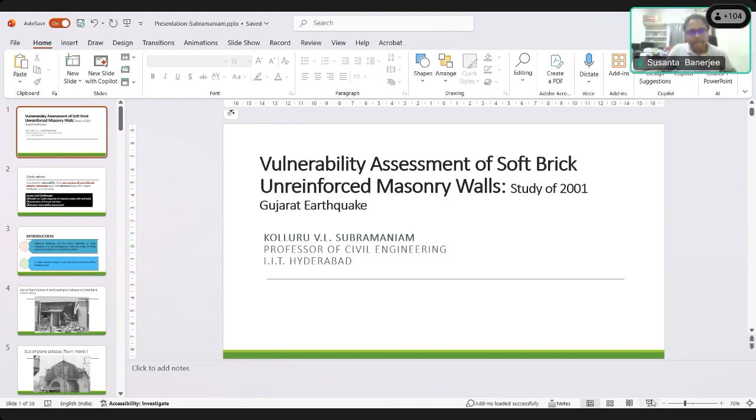So what I would like to present today is about vulnerability assessment of soft brick unreinforced masonry walls, and I'll illustrate this with the 2001 Gujarat earthquake. That's basically a case study that I will be presenting. The whole idea here is to understand what is the vulnerability of this particular form of construction.

Now, why even look at this form of construction? The reason is that if you look at 70% of our construction in India, it is basically what we call unregulated or non-engineered construction. And of that construction, a predominant stock of buildings is basically made up of unreinforced masonry walls.

These are used as load-bearing masonry. Usually what happens is the structure starts off as a non-engineered structure. People build with experience—they stack up some masonry walls, put a concrete slab on top, and that becomes a temporary abode for some people. Initially they start residing there, then they start expanding by building floors above it.

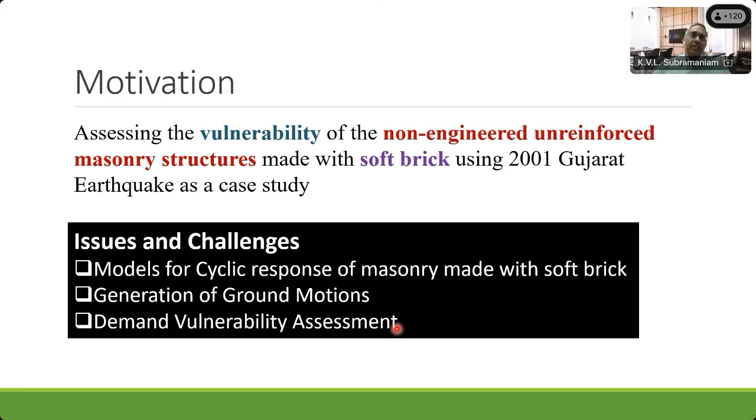Coming to the introduction, masonry buildings are the oldest buildings, and have been used for a long time. Masonry is a non-homogeneous material because it's basically made up of two materials, brick and mortar, placed in a repetitive pattern. So what you get is a composite material, not a homogeneous one, where thankfully we have a repetitive pattern of joints that form between the bricks.

Now, in India, as I mentioned, more and more we are seeing masonry made with soft clay brick, and we are finding that a lot of our construction, almost 60% of the building stock, is made up with this soft clay brick.

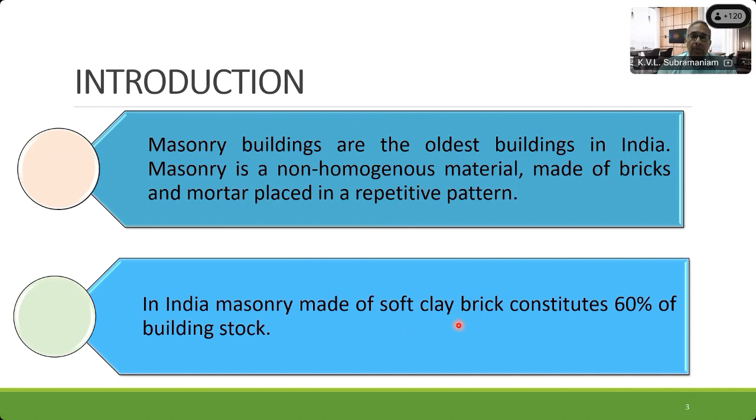Let me start by showing you the nature of the problem we have. This is the outcome of what happened after the Bhuj earthquake. You see a lot of unreinforced masonry, a lot of it load bearing. In this case, this is a particular case of out-of-plane failure of masonry.

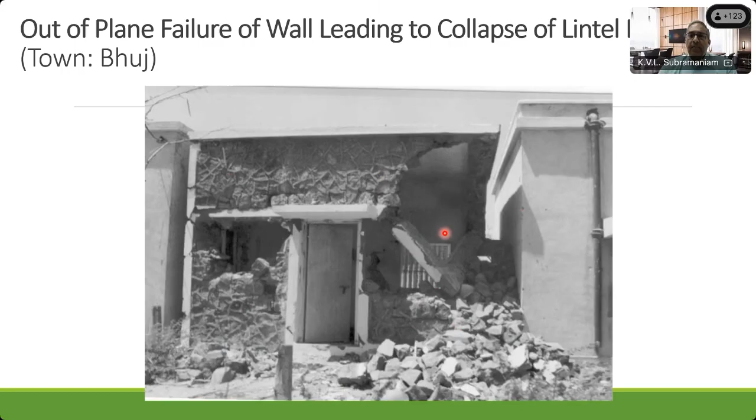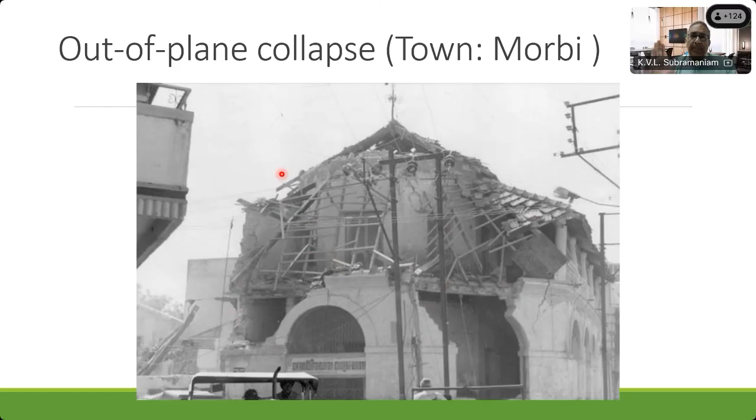But there were also a lot of out-of-plane failures of masonry structures, and this is exactly what I was talking about. You see the masonry here, load-bearing masonry with a concrete slab, and this stands no chance against an earthquake. This is again an out-of-plane failure where the wall collapsed in a direction out of plane of the wall itself, but there were also a lot of in-plane failures. You see this particular house here, again masonry construction, with diagonal cracking and extensive damage in all these load-bearing masonry structures.

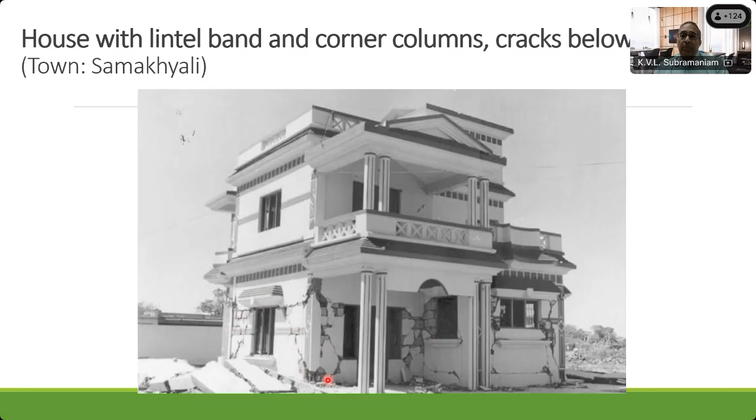More cracking that you see here. This, of course, is a case of an infill where you have a reinforced concrete column where masonry is used as an infill, and even there you saw extensive cracking in the masonry unit.

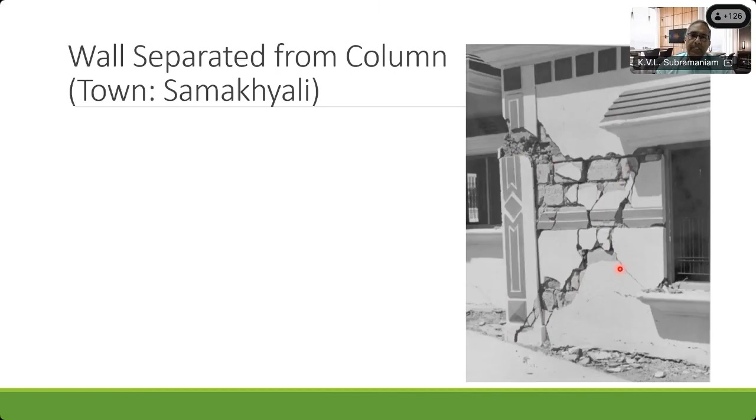So coming to the first part, it was basically trying to understand the behavior of masonry. What do we know about predicting the response of masonry, particularly under lateral loads?

Typically, when we look at a masonry unit like what you have here, it's an assembly of bricks which are put together, and they're separated by these mortar joints. The horizontal joint is called the bed joint, the vertical joints are called the head joint. So the bed and head joints are formed. We have a repetitive pattern of bricks held together by this mortar, and the mortar is basically the glue that holds together these bricks.

Now, it's a composite material because it's made up of more than one material. You have brick and mortar, and therefore, if you want to really predict the response of masonry, what becomes important is the relative stiffness of these two materials. The stiffness of the brick and the stiffness of the mortar play a very important role in determining the load response of the masonry.

Now, most of the studies in the literature come from stiff brick masonry. So what do we call stiff brick masonry? It's where the brick unit, which could be hard fired clay or stone, is extremely stiff. If it's made of stone, you know it's a very stiff material, and you have a cement mortar or lime mortar that holds the stones together.

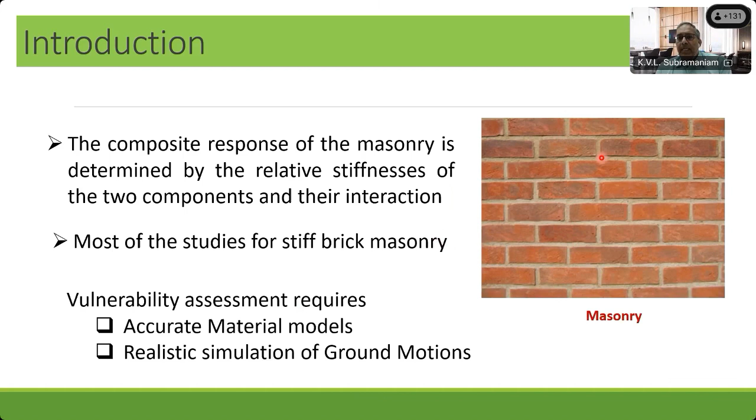So what is the purpose of this stack bonded masonry? It helps us understand the stress states that are produced in the masonry. Now, typically masonry is used as a compression member, for carrying compressive loads or gravity loads, and most of the designs we see for masonry are gravity load based designs and stress based designs, which basically work on minimizing tension because masonry is very weak in tension.

And the primary concern, if it is a load-bearing wall, is the gravity load, which would basically produce a compressive state of stress in the masonry. Now, it's a composite material.

What happens typically in stiff brick masonry is that brick is stiffer than the mortar, so the brick has a much higher modulus. So when I apply a compressive stress, the brick doesn't expand as much. The expansion comes about because of lateral expansion, which we associate with the Poisson's effect. Because the brick is stiff, it doesn't compress as much and it does not expand as much. Whereas mortar, typically in stiff brick masonry, is softer than the brick, which means the mortar would actually compress more and also expand more in the lateral directions.

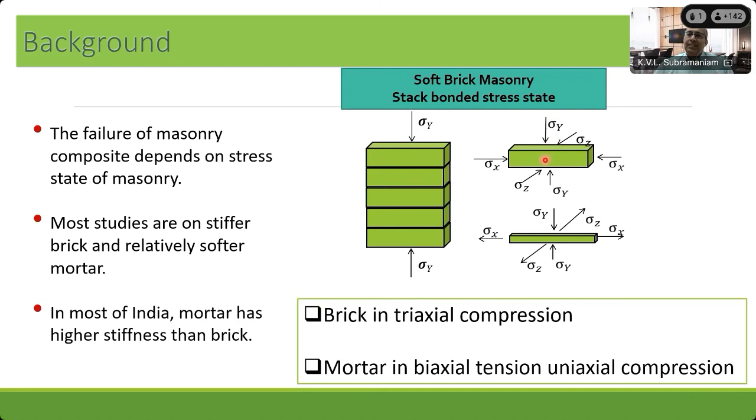Yes, okay, right. So now let me show you the compressive behavior of mortar. Remember what I said, going back here, we said both the brick and the mortar are classically quasi-brittle materials, meaning both will have a compressive strength higher than the tensile strength. Both materials are weak in tension and strong in compression. And because the properties of these two materials are different, although I apply a uniaxial compressive stress on the masonry, I end up producing a triaxial state of stress in the masonry.

Now, when we look at the compressive behavior of mortar, and you typically do a cylinder test or a cube test, this is what the compressive stress-strain response of the mortar would look like. We made two types of mortar, a weak mortar and a strong mortar, and I'll explain the reason why we tried two different forms. What's important to see here is when we took the strong mortar, which is a little cement-rich mortar, the compressive stress-strain curve builds up to a peak, giving a compressive strength of around 30 megapascal.

And then the residual stress, or stress resistance, slowly decreases as I increase the strain. The maximum stress is reached around 0.002 strain. This is exactly what we expect from our concrete, it looks like a typical compressive stress-strain response of concrete. What is important is this lateral strain.

This blue line shows the lateral strain, the expansion produced in the mortar as we apply compressive stress on the cylinder, measuring how much it expands. Up to the peak, there is only a little expansion, but after the peak load, there is a tremendous amount of expansion. So this material expands a lot. It actually dilates a lot close to failure.

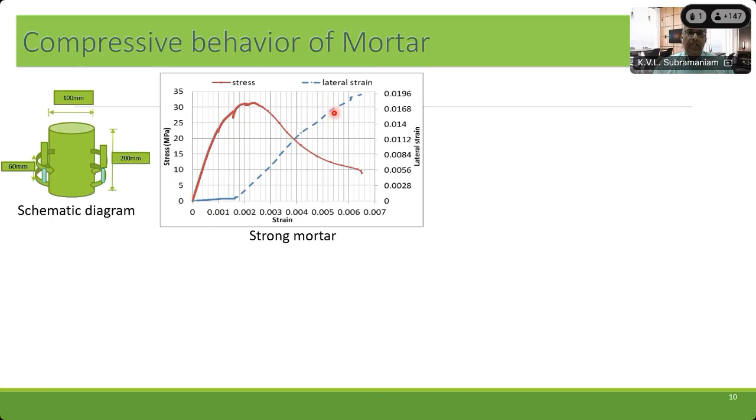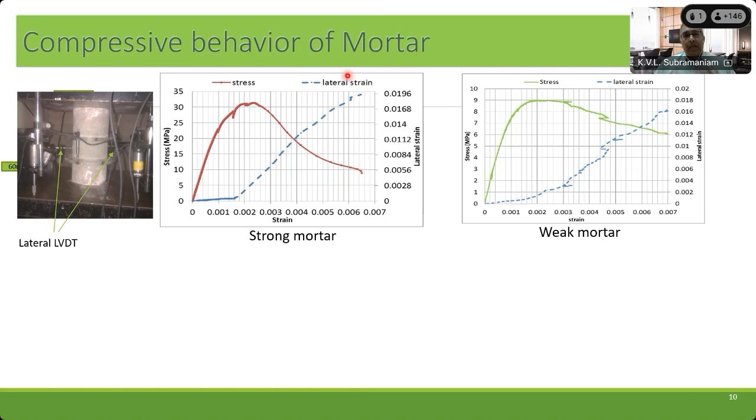Now if you look at a weak mortar, one that we made which was not as cement rich and had lower strength, you can see its stress strain response in the green line, and this is the lateral expansion. Even this mortar has a good amount of expansion taking place as it fails. The actual failure of the strong mortar, where the material completely crushes, happens here, and a good amount of expansion is produced before it fails completely.

Now, the Poisson's ratios of both mortars are almost equal, whether strong or weak - one is 0.19, the other is 0.2. Poisson's ratio is the lateral strain produced as you deform the material in the vertical direction. Remember, Poisson's ratio is measured while the material is still linear elastic, valid only up to about 50% of the peak load. After that, when the material becomes nonlinear, we cannot measure a Poisson's ratio.

Now, if I normalize the stress strain curves of the strong and weak mortar, we find the weaker mortar has a very gradual decrease in stress after the peak load, whereas for the stronger mortar the decrease is very rapid. This is typical of concrete-like materials, where making them stronger makes the material more brittle. So when we went to the stronger mortar, the material does become more brittle.

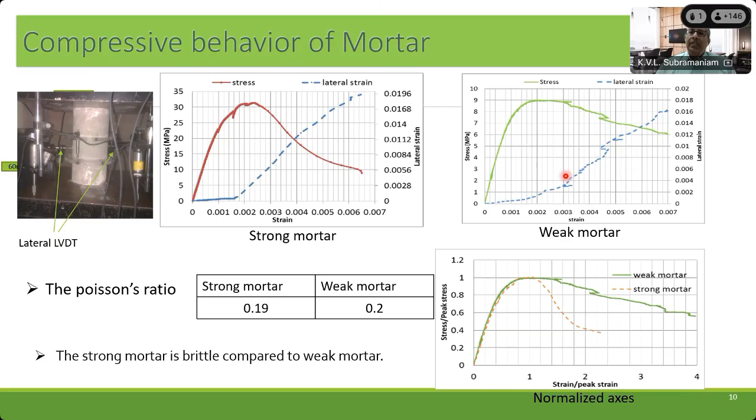The reason for trying these two mortars is straightforward. The stronger mortar is what I would expect in cities, where we are perhaps more conscious and use more cement, whereas the weaker mortar is what you may see in villages, where they skimp on cement and the quality is not so good, so the compressive strength of the mortar is also much lower.

Now, for the brick we sourced, we used a brick with a compressive strength of 15.6 MPa. My strong mortar is 1:3, meaning 1 cement to 3 sand, and the weaker mortar is 1:6, meaning 1 cement to 6 sand. You can see the difference in compressive strength and Young's modulus, which is the stiffness, for the mortar.

So when I made the mortar stronger, going from the 1:6 mortar to the 1:3 mortar, it became stronger - its compressive strength was much higher - but it also became stiffer. Again, this is expected from concrete-like materials.

But notice what happens here with the brick that we sourced. Its compressive strength was 15.6 MPa, which is not bad, and if you compare it with the mortar, it lies somewhere between the weak mortar and the strong mortar. So that's actually not the problem here. Look at the Young's modulus - it has only 1 GPa stiffness. It's actually a very soft brick.

This is typical of what we are finding in bricks in India today - the bricks are strong, meaning they have high compressive strength, but they have a very low modulus, meaning they are very soft. So the story in India is flipped. Typically, masonry would use hard-fired clay bricks which were very strong and very stiff, almost like ceramic, or masonry made with stone, which is also very strong and very stiff.

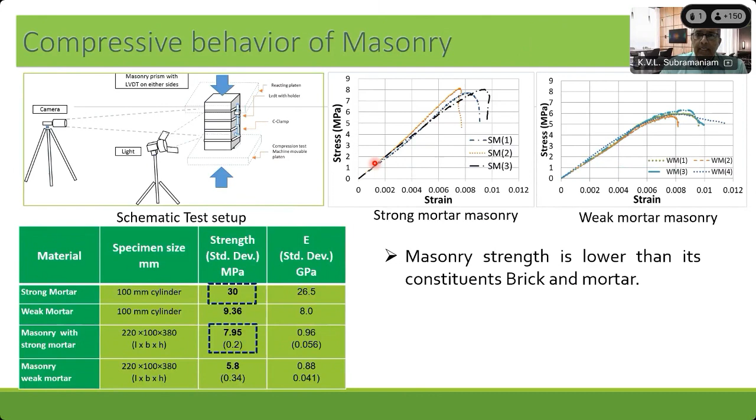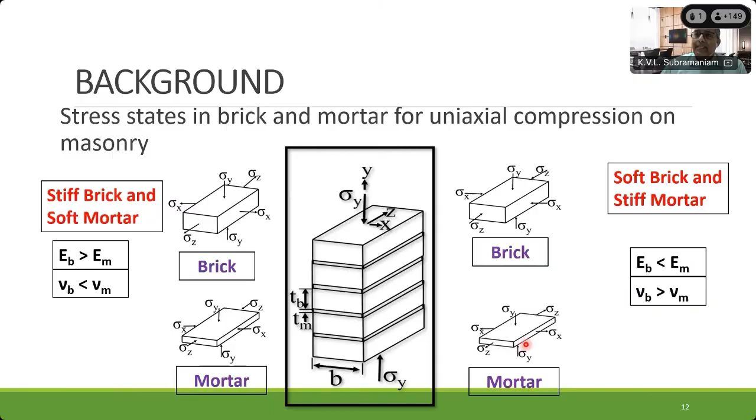When I apply compression on it, what we find is that the brick is in a state of triaxial compression. The mortar is in a state of biaxial tension and uniaxial compression. Now, in that case, if you look at it, what happens?

The crack starts right at the interface between the brick and the mortar, where the tension is there in the mortar. The mortar splits first, and then that drives the crack into the brick. The crack then grows, and basically you get splitting of the masonry, because everywhere the mortar is in a state of biaxial tension, in the plane of the joint. So in this plane, the mortar is in tension, and that causes splitting of the mortar, which induces cracking in the brick.

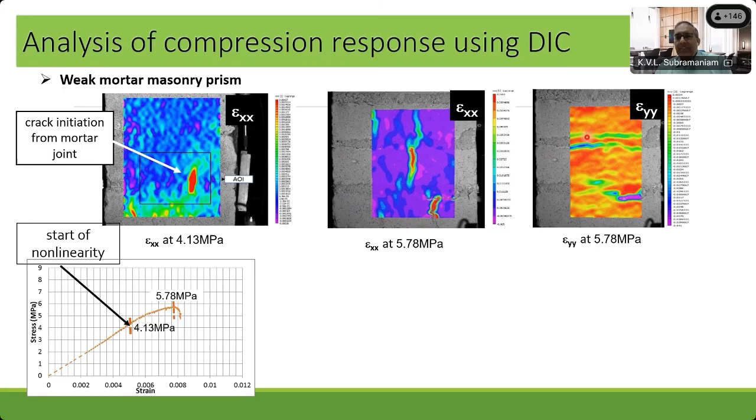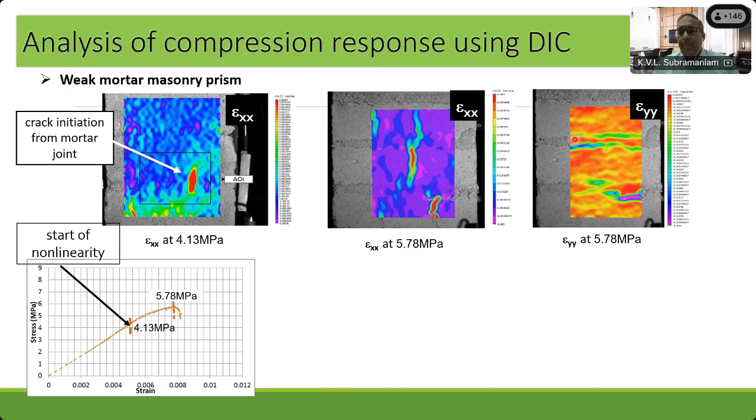The other thing we observe is a localized failure that happens. The brick, which is in a state of triaxial compression, experiences localized compressive failure—it crushes. So there's a crushing mode of failure that happens in the brick, along with splitting perpendicular to the joints, that we observe in these masonry assemblies.

Now, when we go to the masonry that we had made with different aspect ratios—remember, we made these masonry assemblies with different aspect ratios—every time we tested any of these brick masonry assemblies, we were looking at the strain contours using digital image correlation, which gives you a surface map of displacements, and from the displacements you can construct the state of strains.

This is basically one particular arrangement of bricks where we have a head joint and a bed joint, then another masonry unit, another bed joint and head joint, and so on—that pattern repeats itself. The aspect ratio is 1, meaning the cross section of the specimen is 1:1.

What we find is that in this particular masonry specimen, a lot of tension is produced even in the head joint here. We plotted the strain along this region and calculated the stress from it. We find that very heavy tension is produced in the mortar, which we expect.

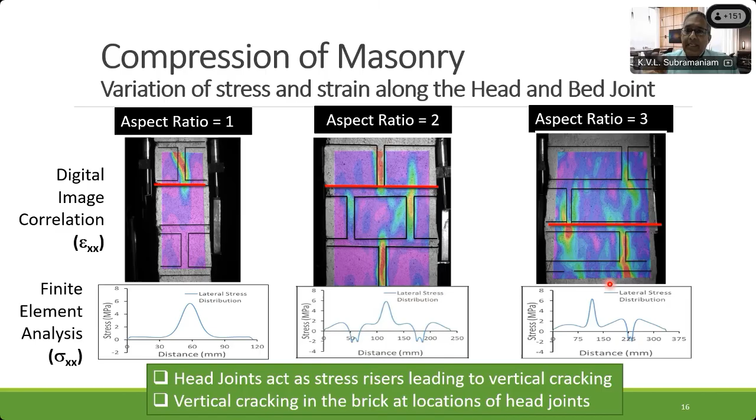The tension in the mortar is what causes splitting of the brick directly below the head joint. Even when we went to higher aspect ratios, anytime we had a head joint, we found that the tension was very high right here, which led to cracking in the brick directly below the head joint. Same thing here. So wherever we see head joints, this tension produced in the mortar leads to splitting of the brick directly below the head joint. These head joints act as stress risers and lead to vertical splitting of the bricks in the masonry.

Next, we also study what stress transfer takes place between brick and mortar in shear. How much shear transfer takes place? That's again very important when we start looking at the in-plane behavior of masonry.

For that, we used a very simple triplet test. In the triplet test, we basically have three bricks: two bricks at one level, and the third brick set. As you can see here, this brick is a little offset in height. Now this forms a triplet - two bricks at one level and then the third brick which is offset.

If you put this assembly on the floor and push down on the middle brick, you'll induce shear in this mortar interface, and also shear in this other mortar interface. This setup allows you to study the shear transfer that would take place from this middle brick, as you push down, to the two side bricks sitting on the sides. This allows you to study the shear transfer taking place across the mortar interface. Remember, mortar is an interface between the bricks, enabling stress transfer between the brick units.

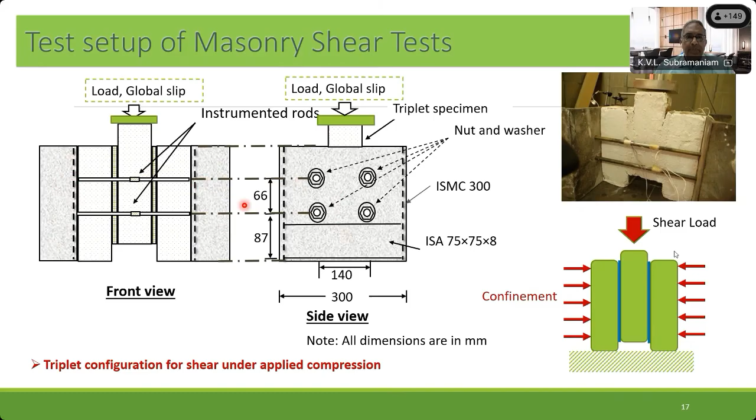What we did, which is a little interesting, is a modified setup where we were able to apply confinement on the brick. This confinement comes from a setup where we put channel sections on the sides, and by tightening the rods, which were instrumented so we could measure the amount of stress we are applying, we could subject this triplet arrangement to a confinement stress and then do a triplet shear test.

Why is this even relevant? In a typical masonry wall, the confinement would come from the vertical loads. And the shear loading we're talking about, where we're trying to evaluate the shear stress transfer, is something you would expect when looking at the in-plane behavior, the in-plane shear response of a masonry wall.

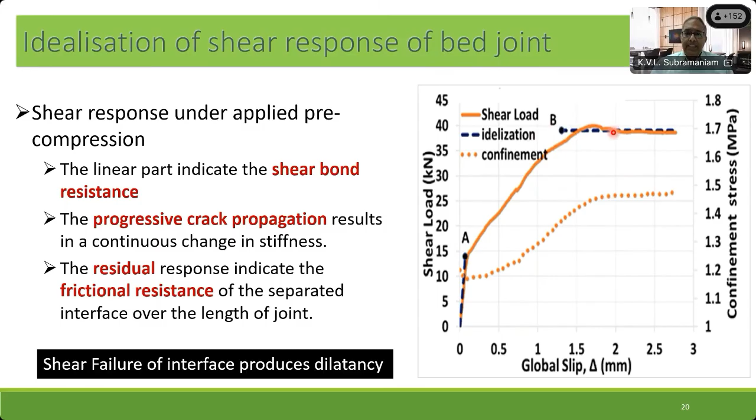It's completely cracked. Now the crack surfaces, as they're slipping past each other, there's a constant amount of expansion that produces a constant amount of confinement in the system. At this point, the resistance is coming purely from frictional resistance between the two faces that are formed. Therefore, because the confinement is constant, the frictional resistance is also constant. So this is basically what's happening in a typical shear test.

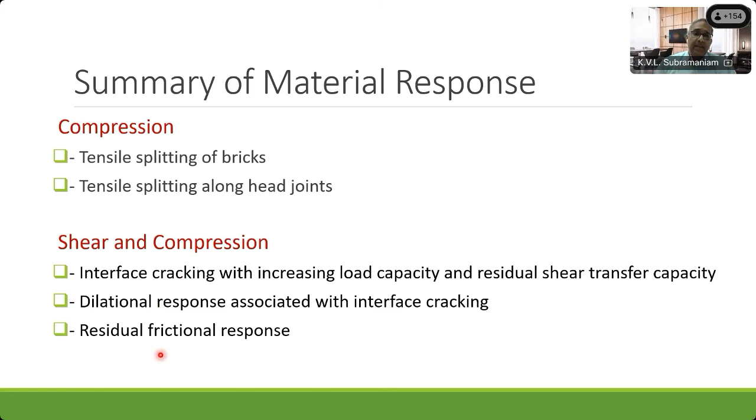So in summary, when I talk about masonry, I have tensile splitting of bricks that we see, because of the biaxial tension state produced in the mortar, and we see tensile splitting along the head joints. In the mortar, shear and compression, we see interface cracking, which happens between the brick and mortar interface. It's a dilational response, meaning as the shear crack forms between the brick and mortar interface, there's expansion that takes place. And the final resistance is given by the residual frictional resistance between the two materials once the crack is formed.

So now I'll quickly run through the modeling of this. With this data, we developed a material model, also called the micro model or micro approach, where if you have a masonry assembly like this, you basically assume that the mortar interfaces are infinitesimally thin. You expand the bricks so that the mortar interface essentially disappears and becomes infinitesimally thin. This is now called a joint.

And everything in between is called a unit. This unit is basically made up of the brick and some part of the mortar here, half of the mortar here, and half of the mortar here. So what is the role of this joint here?

This joint has the same properties of the interface that we obtained from our test before. Now, in this so-called pseudo assembly that we've created, we are basically creating a unit that consists of the brick and the mortar. We come up with the effective properties of this unit, which is an effective property of combined brick and mortar. This is a very well-established approach.

And then we get into this pseudoplastic kind of formulation, except now we treat the brick as if it is an elastic and perfectly brittle material, which fails by cracking. The interface between the bricks, which used to be the mortar, is now modeled as an infinitesimally thin layer, which has a finite shear versus confining stress kind of response.

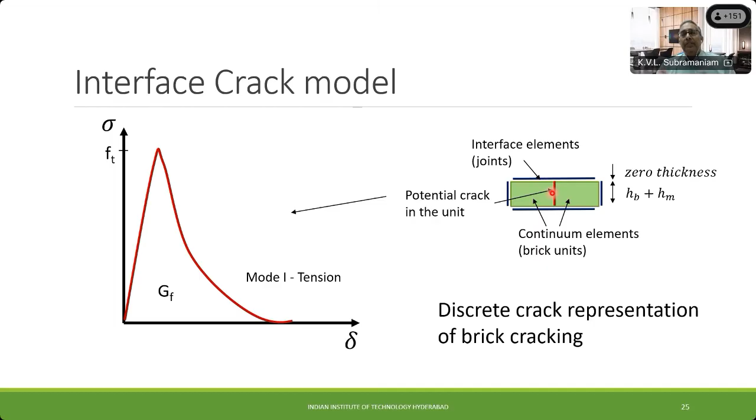And when it comes to the head joints, we can basically put a vertical gap between the two brick elements where we expect to see splitting between the bricks.

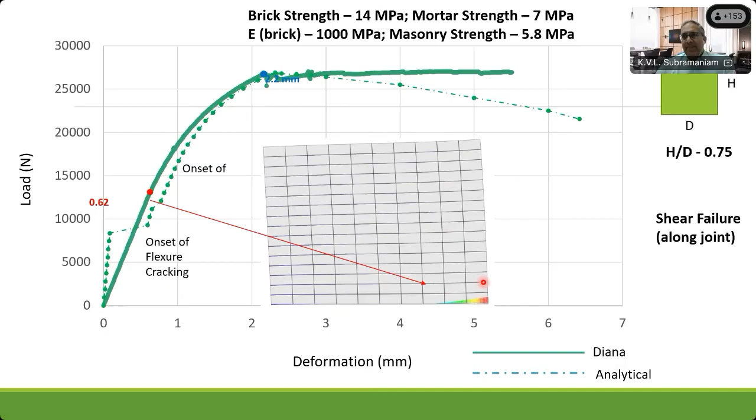We can also actually predict the failure in this masonry unit, where in this particular case there is onset, and it basically fails in flexure at one side, and with continued loading we can see when the diagonal crack would start to form. It's a squat wall that basically fails in shear, a shear crack forms through this.

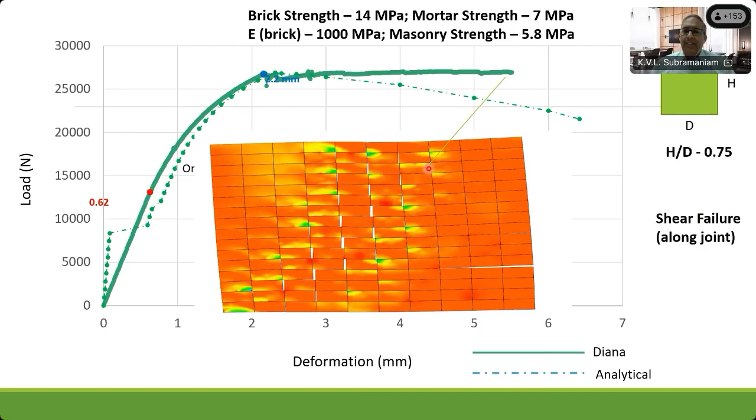We can now simulate the damage that happens in the brick as I push the wall all the way up to failure, where the failure of the wall happens because of this shear diagonal cracking that forms in the masonry.

Now, this is the diagonal shear cracking in the masonry that is predicted for a squat wall made up of brick with 14 MPa strength. This is the brick that we used in an experimental program, with the low strength mortar made up of soft brick of 1 GPa stiffness.

Similarly, we can also predict the flexural cracking response of the same masonry. What do I mean by flexural cracking? If I take the same masonry wall, subjected to 0.3 MPa compressive stress, but now my H over D ratio is 1.5, so it's getting taller compared to its width, and apply the lateral force, we see that the failure pattern changes completely.

Now, this particular wall fails in flexure. It fails in a flexural mode. The final mode of failure is by crushing the brick at its toe, which is basically the far end from where I apply the lateral load.

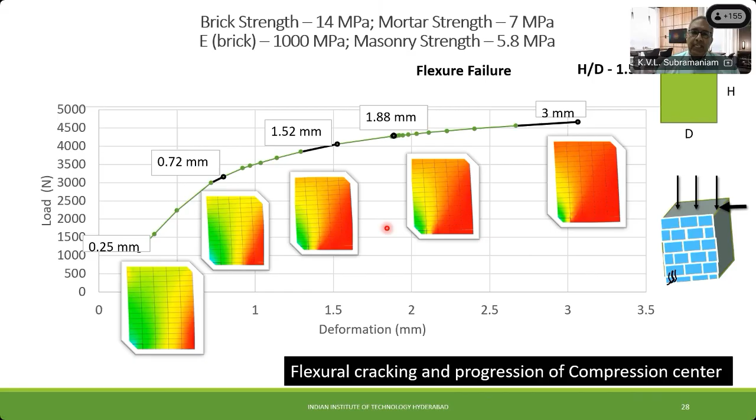Now, if most masonry walls have vertical compressive stress, which comes about from the load that is bearing on them.

Typical numbers range between about 10% to 15%, maybe 20%. So this is more the typical range of compressive stress carried by most masonry walls.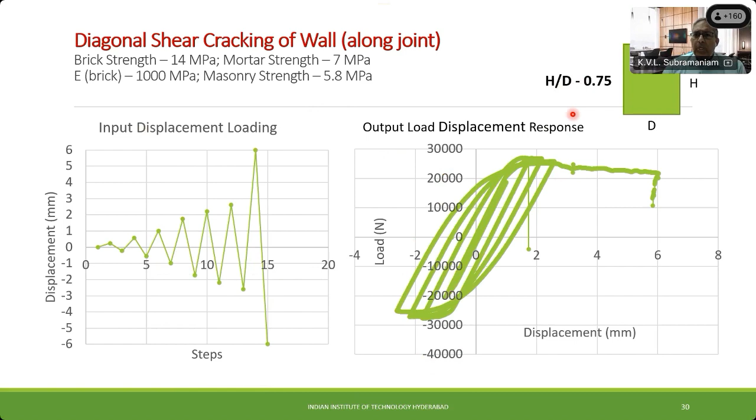This is a typical response that we got from the cyclic behavior. It's what we call a pivot type of behavior, where you see that most of these load cycles are pivoting at a point. This is something that is predicted, where we are starting to see a pivoting behavior.

Experimentally also, data that's available had a pivoting type of response for shear walls, which failed in shear. Then the walls that failed at sliding, which are squat walls with very low levels of compression, the kind of failure we get looks like an elastoplastic kind of response.

The reason I'm bringing this up is because at some point we'd like to be able to do parametric analysis where I can parameterize these, and then I should be able to run simulations for different types of walls.

When we come to flexural failure, here is a wall that is slender, where the height is bigger than the width, and subjected to a moderate level of compression. What we get is a hardening plastic kind of response from this particular wall.

So now, when it comes to cyclic behavior, we are able to handle and see that the cyclic behavior of these masonry walls, depending on the level of compression and the aspect ratio, falls into one of three categories. It fails in shear, it fails in flexure, or it fails by sliding. Each one of them has a very typical cyclic response.

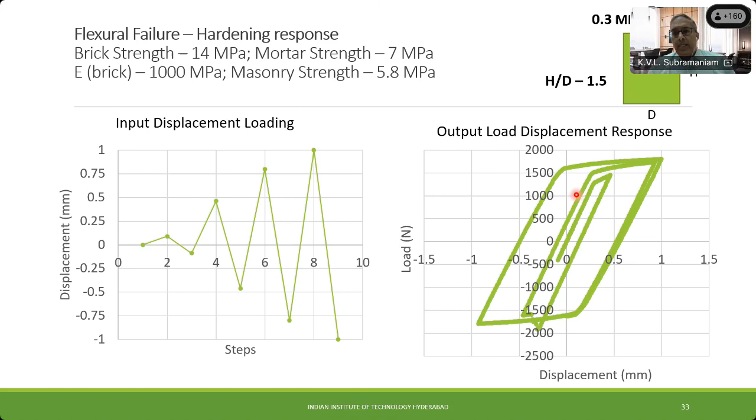So that is the material part of it. We seem to now have material models that can accurately model the cyclic response, built from the ground up. I haven't presented in detail the plasticity modeling, plasticity coupled fracture model that we did for the masonry, but hopefully I presented enough to help you understand that from material tests, we scaled up and developed these calibrated models for masonry.

What is different about the models I presented here is that these models work for soft brick masonry. They work when the brick is softer than mortar. How much softer? In the experimental program that we did, the brick had 14 megapascal compressive strength, but a stiffness or Young's modulus of only 1 GPa.

Mortar, the weak mortar that we produced, with a ratio of 1 part cement to 6 parts sand, had a compressive strength of about 7 megapascal, but Young's modulus of about 10 GPa. So the mortar, even in the case of a weak mortar, is 10 times stiffer than the brick.

Now, coming to the ground motion generation, we decided that we would look at the Gujarat, the Bhuj earthquake for a case study. In 2001, as you all know, there was a massive 7.6 magnitude earthquake that struck the Kutch region. The sad part is that there are no strong ground motions available. None were recorded. We did not have any recording stations here. We didn't expect an earthquake, so there are no ground motions available.

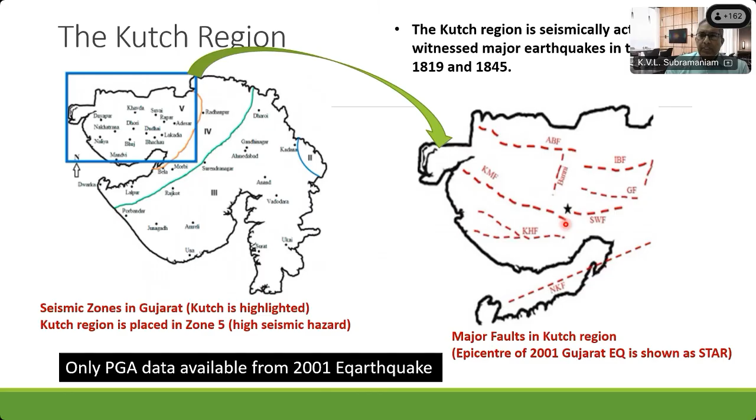Now, how do we go around estimating ground motion? One thing we could have done is actually taken existing ground motions and scaled them. But there are issues associated with scaling of naturally occurring ground motions, because earthquake ground motions captured in different regions have different frequency contents and other things. So we decided that we would actually generate synthetic records of ground motions.

And for this, again, there are different ways of doing it. What we decided to do was to use the modified stochastic finite fault model, which is available in the EXSIM software, which allows you to do that. The only issue here is that the data required to generate ground motion records with this is beyond what most civil engineers would even have access to.

To tell you about the stochastic finite fault model, what we do is take a fault and divide it into smaller subfaults. Basically, each of these acts as a source. The simulated accelerogram then is made up by combining each of these source points on the finite fault surface. From each source, the ground motion is simulated, and the final record is a sum of all of these records.

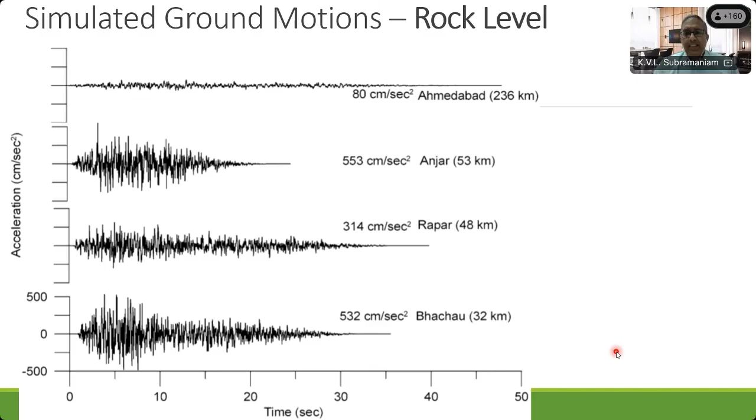So all of these parameters were given to us by the geophysicists. From there, we were able to generate the acceleration, the ground motions at the rock level using the fault data available to us. Because we only had PGA values - the recorded PGA values, 13 PGA values at 13 towns in Gujarat - the first thing was to match these things at the rock level, and that is what we did. We got a fairly good match of the ground motions, except 2 or 3 stations, which had some issues with the way some corrections were done to the data.

Next, the ground motions simulated at the rock level were then used with soil amplification functions. The surface ground motions were predicted using the soil amplification data. Again, this was given to us by the geophysicists. So we got the soil amplification data for each of these towns from the geophysicists.

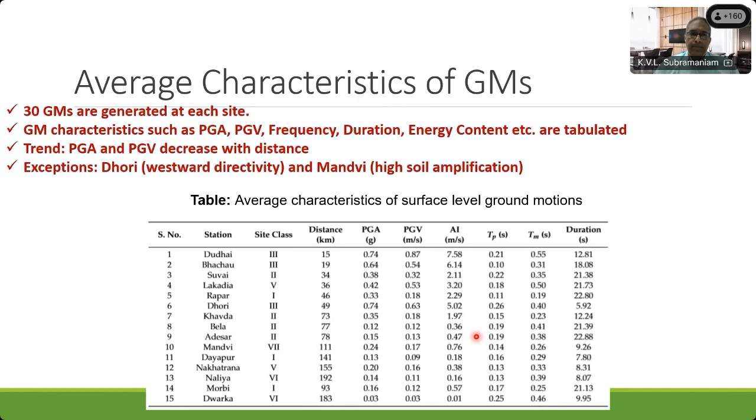And then we use this to come up with a suite of ground motions. For each location, we basically generated 30 ground motions. Each ground motion had this random seed, which allowed us to produce a suite of different ground motions. And then we got the rock level motion, and using the soil amplification function, we projected it to the surface.

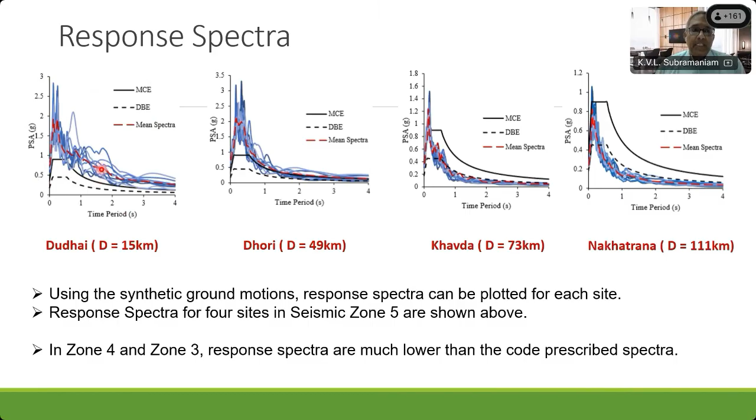So these are the response spectra for four of the towns located in zone 5. From there, you can start playing these games where you can generate the mean spectrum, the maximum considered earthquake, and the DBE as given in IS 1893. The black and dotted lines are the maximum considered earthquake and the DBE. What you can clearly see is the mean spectrum itself, and most of the spectra were lying way above even the MCE values for this earthquake.

Next, now we have the ground motion spectrum with all the variabilities. Supposedly, we've captured the variabilities. The hitch there is that we were pegging everything to the PGA. So we had only the peak ground acceleration, and we were trying to match that and predict the ground motion using the finite fault model.

Now we have the simulated responses for different walls. So here, wall 1, suppose I take one with lower axial load. When you take a wall with low axial load, it will fail in flexure. It fails by the pivot model. So we calibrated a pivot model to this response.

Take another wall which has a higher level of compression on it, so higher axial load. This fails in shear. And again, this is calibrated with a pivot type of model that you see here.

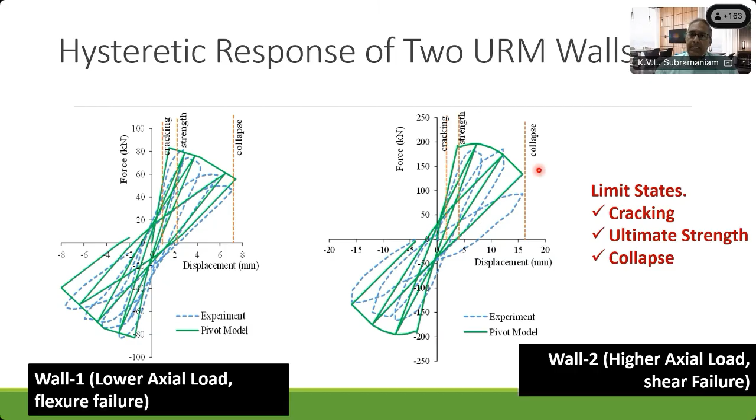Now, the limit states are identified from the model. One is cracking, which comes from the envelope curve. This is the envelope curve, so the masonry cracks here. This is identified as a strength state, maximum stress. And this is collapse, where the masonry fails. So these are the 3 limit states: cracking, which happens very early in the response; then strength, which is the maximum resistance; and then collapse, where it fails and essentially there's no more load resistance.

So now, to bring in uncertainty in the pier calculation: the first part was modeling the response, which we were able to do mechanistically. Then modeling the cyclic response, which we did. Then we fitted parametric models to the cyclic response. But the most important thing is to consider variability in the material properties.

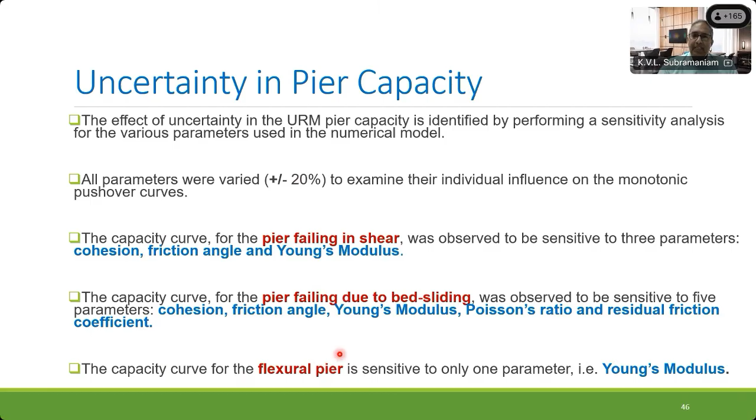To do that, we considered the important material parameters and varied them about plus or minus 20% of the mean to see which were sensitive parameters. We found that when predicting the capacity curve, the monotonic pushover curve, for a pier failing in shear, it is sensitive to cohesion, friction angle, and Young's modulus of the brick. Similarly, piers failing in bed sliding depend on all 5 parameters, and those failing in flexure depend only on the Young's modulus of the brick, or whatever the sensitive parameters are.

Then the question is how do I go around sampling these material properties? Because if I want to do something like a Monte Carlo simulation, there are way too many variables. I have ground motion variables, and then of course the material variables, and there are 5 material parameters: cohesion, friction angle, Young's modulus, Poisson's ratio, and residual friction. If I start varying them, I would run into millions of data sets.

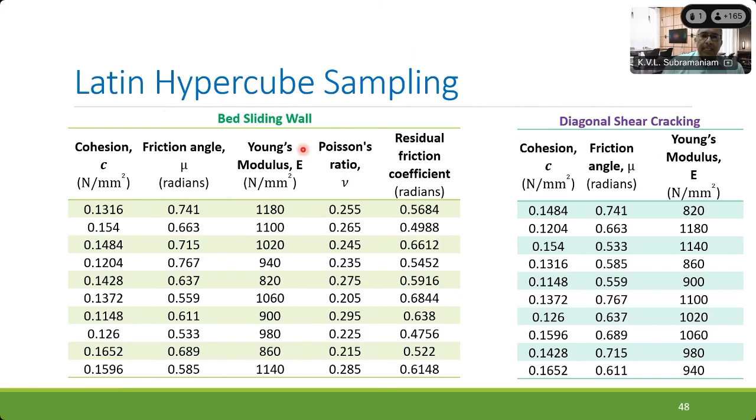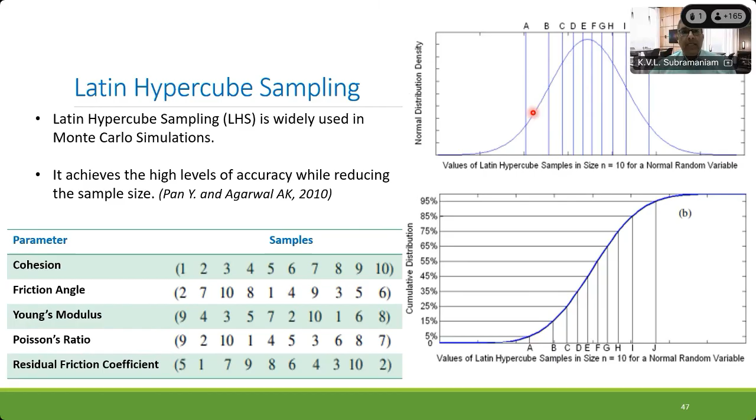So what we decided to do is use Latin hypercube sampling, which allows us to create random sets. Essentially, with the Latin hypercube, we are able to create a smaller data set, which through this random sampling allows us to capture a high level of accuracy while reducing the sample size.

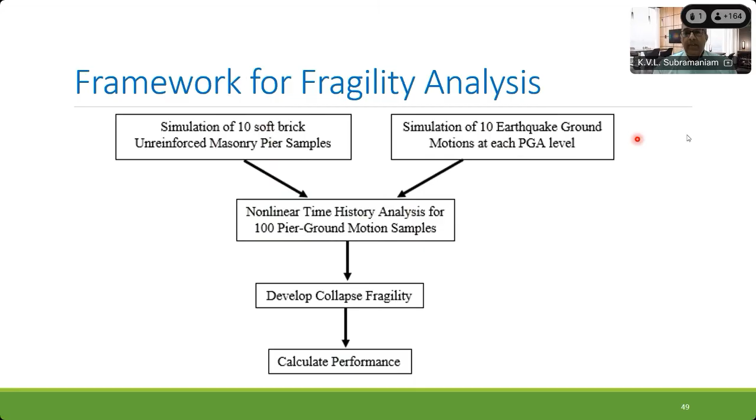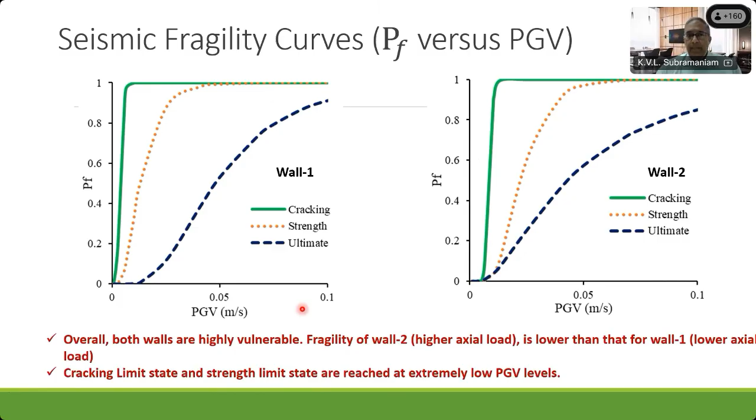So yeah, from this whole study, what we've managed to do is first look at the material that we're dealing with. When we started playing around with the material, we realized that we cannot use the material models that have been developed for masonry and apply them directly to our case, because the masonry that we're dealing with in India has exactly the reverse properties of what everybody else has been using. And that is, we're dealing primarily with what we call soft brick masonry walls.

The brick is very soft. Its stiffness, its Young's modulus, is very low compared to mortar. While its strength is moderate to high, its modulus is very, very soft. And what that does is it completely changes the stress state in the masonry compared to what we are expected to believe when you're dealing with high stiffness bricks in masonry.

What we find going further is, if we consider bringing in the variabilities and all these, we find that different parameters of the material model influence the behavior of walls differently.

Now, when you're looking at a masonry wall, there are three types of walls. You have a shear wall that fails in shear, you have a wall that fails in flexure, and you have a wall that fails in sliding. What distinguishes these three walls is the aspect ratio, the height to width ratio of the wall. And not surprisingly, if I increase the aspect ratio, that is, if I make the wall slender, it fails in flexure. If I make it squat, it fails in shear or in sliding.

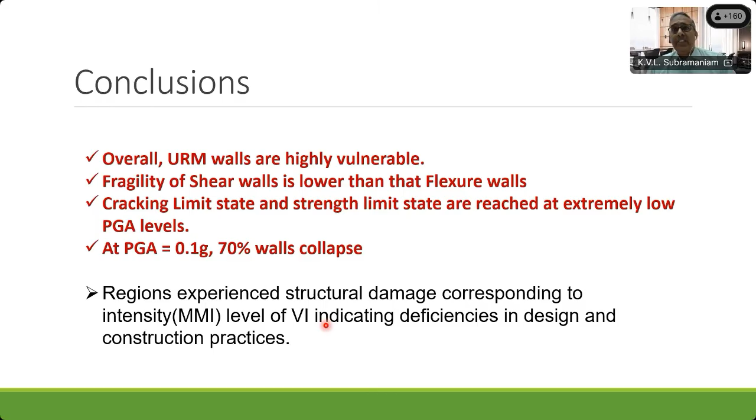All of those basically failed, so most of them had either reached their capacity, the strength limit, or they had actually collapsed. The region experienced structural damage corresponding to intensity level 6, indicating deficiencies in design and construction practice. Basically, this is the sad story about the construction in India, where a lot of it is non-engineered construction, and it is extremely vulnerable to lateral loading.

So with that, I'd like to thank you for your attention, and maybe now we can have questions.

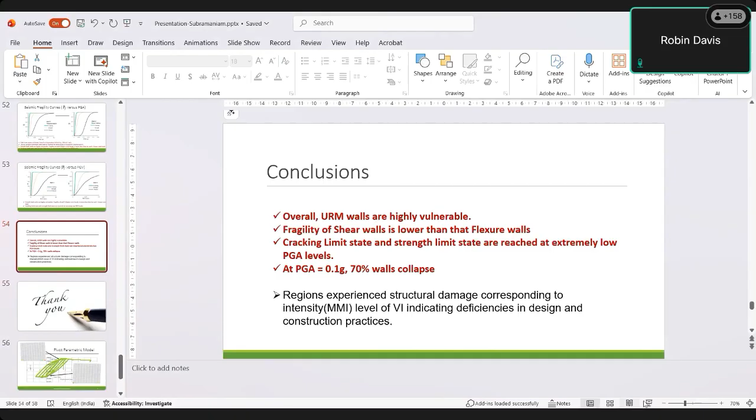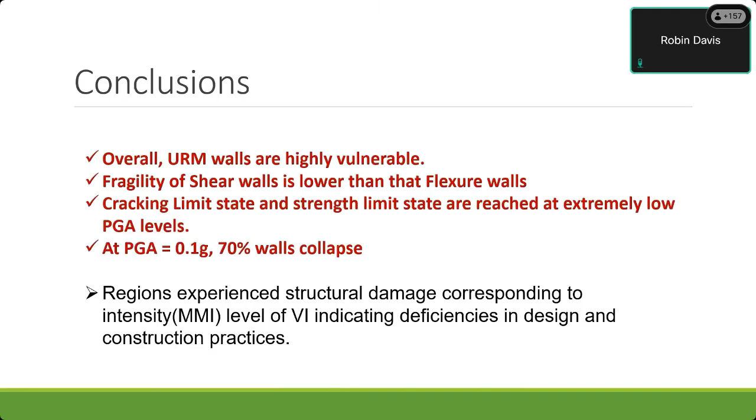Another couple of questions. One more thing I think we have to consider is this out-of-plane mode of failure. I think most of the buildings, if you see the gable walls and all, many times it is failing in this out-of-plane mode. Maybe that kind of study can also be done.

Correct, out-of-plane failure is certainly a valid mode of failure, and we do see that happen as well. The reason why we focus more on the in-plane mode is when you apply, let's say you have four walls which make up a room, or which make up a unit, and you apply a horizontal force on it, the in-plane walls end up taking the load. Essentially, the out-of-plane contribution is negligible. What happens is the out-of-plane wall collapses, it basically falls out of plane. It doesn't have much out-of-plane bending stiffness. So in what we were modeling, essentially we were looking at saying that if you have an out-of-plane wall, discount its contribution and only take the in-plane walls, and then go to the prediction of the in-plane response of a unit or a house made up of multiple walls and so on.

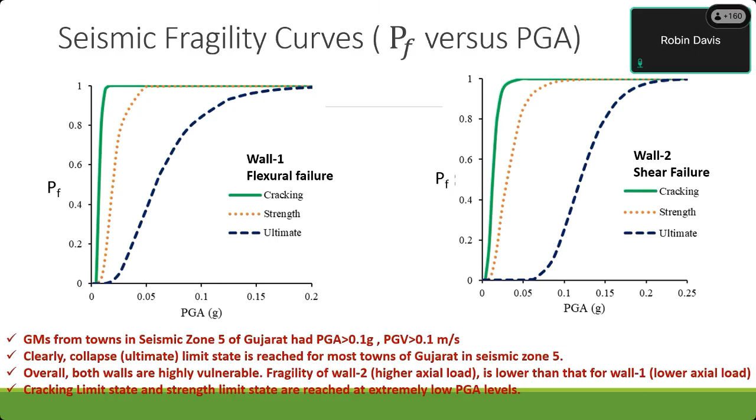Can you go to that fragility curve, before it there is a displacement plot. I'm wondering what that is. If you see each and every point, there is a line which shows some variation in the response, due to material variation. So it can vary that much.

Here what we have is the case of a wall that fails in shear, and we plotted PGA. For each PGA value we had done simulations, and we had considered the material variation in there. Right, it's clear.

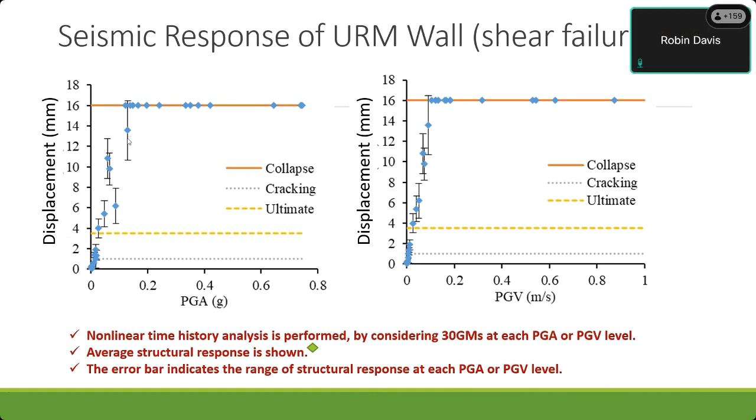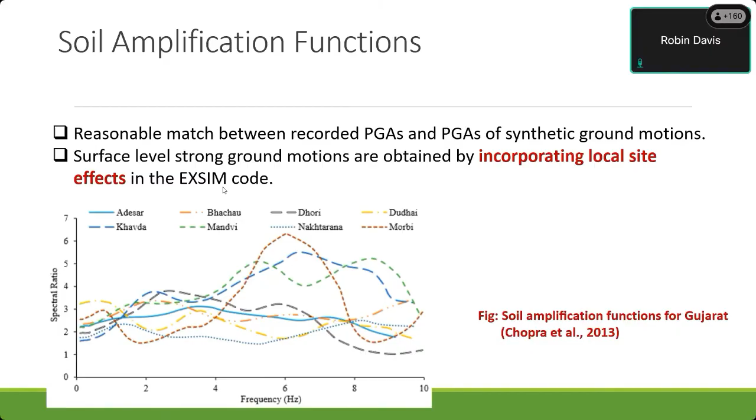You were mentioning that stochastic finite fault method. Which software is that? EXSIM is the one. This is a very complicated model. If you've never used it, these are all the input variables you need, and honestly I don't fully understand all of them. So we were working with a geophysicist, Dr. Chopra, who guided us with all of this. That part is very difficult to generate as well.

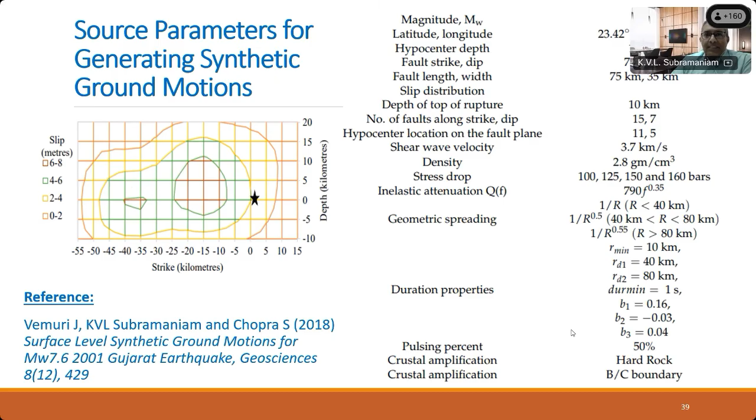The sad irony or tragedy of the Gujarat earthquake is that they only had PGA values at 13 locations, that's it. Even today in India we don't have adequate instrumented facilities to record strong ground motions. Maybe in the Himalayas we have a few sensors, but when this earthquake happened, everybody was looking at each other. There were no ground motions available.

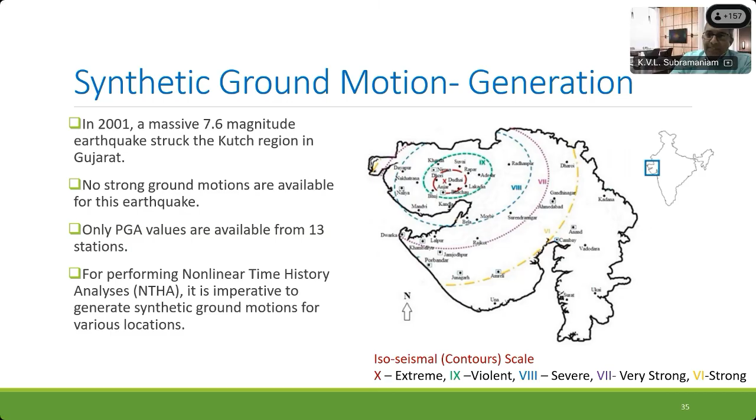So what do you do then? We had only 13 PGA values. So what we tried to do, as I said, was try to wag the dog by its tail: we have the PGA and try to match it, but we know nothing about the actual record. So we tried to create artificial records, but brought in some level of sanity by using this model, which is actually semi-rigorous and based on proper physics.

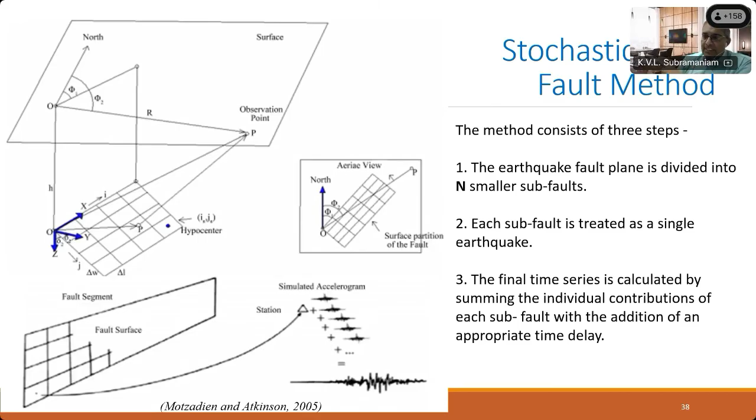So we said okay, we'll take the physics. We know the location of the fault, we know the strike, the dip, and all these things precisely. Then we tried to simulate from that using geophysical data to see if we can predict ground motions.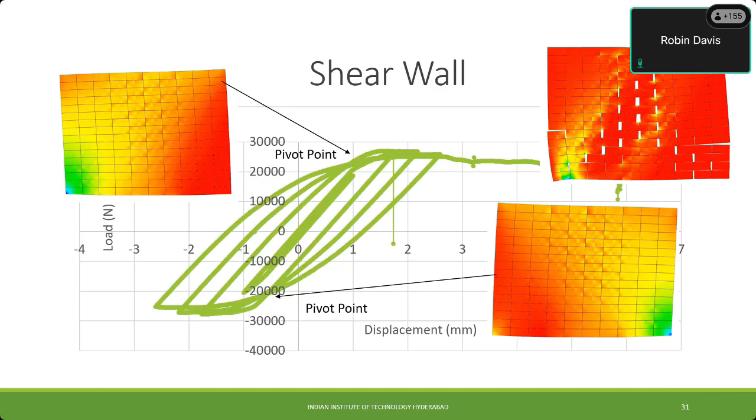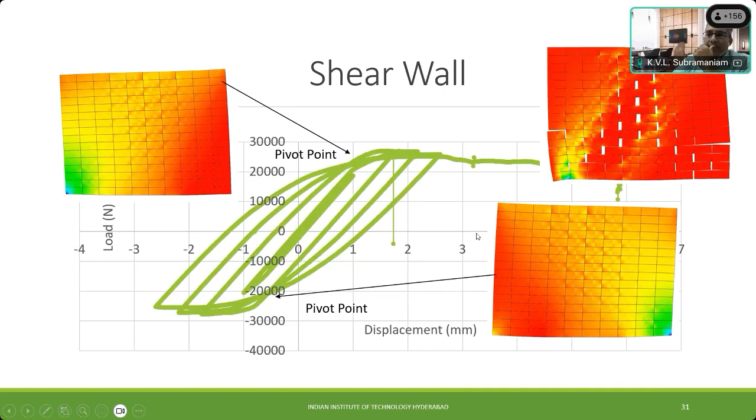What software did you use here, sir? LS Dyna? No, no, this is not LS Dyna. This is TNO Diana. Okay, so this is something that came out of Delft University. We use that for all our simulations, so this comes from TNO Diana simulations.

Okay, and here, if you see this one, it is very nicely matching this overall pattern. But how does that compare with the experimental results?

I forgot to show you that. So we did not do the in-plane experimental test ourselves; that data came from someone else's test. We did compression tests and material level tests from which we extracted material parameters, then put them into a finite element model at the structural scale, which is a physical wall of certain dimensions, and used that to predict and match with the experimental data for that wall.

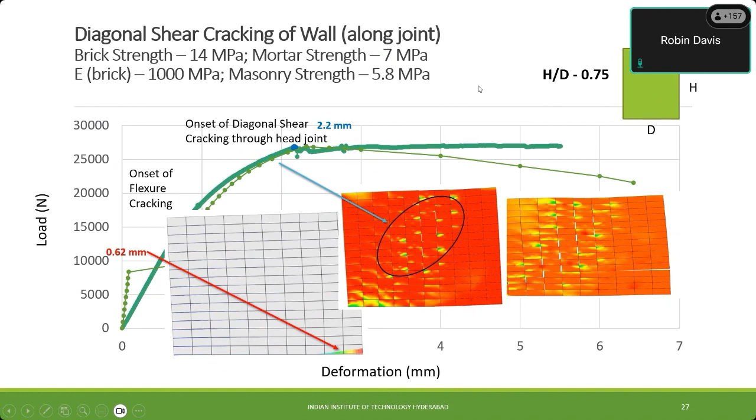You did small specimens, and then you could locate where the first crack was appearing. That we could do. At the material level, we had very nice control on the whole thing, so we were precisely able to locate where the cracks were forming. Very interesting.

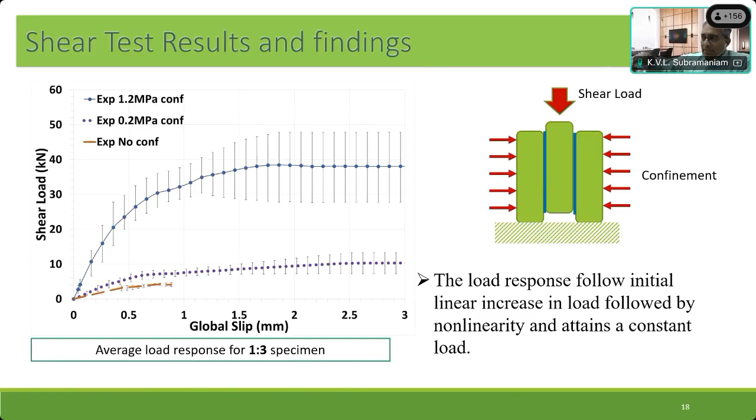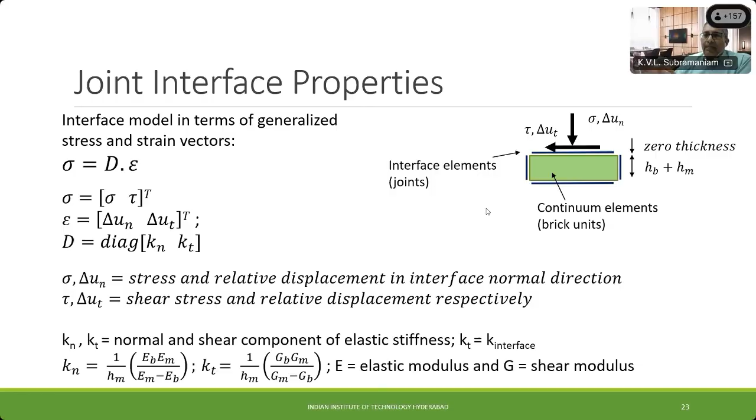This then led to the material model, which was fed into a finite element model, a micro approach developed by Lourenco in 1996. It's basically a plasticity/fracture kind of approach, but it requires a lot of material parameters, which we were able to get from our material level tests. This is the plasticity model they have - a Mohr-Coulomb type failure surface with a tension cutoff and a compression cap.

So this wall test, isn't it difficult? I mean, is it not that difficult? Yeah, that is why. Wall tests are actually notoriously difficult to perform.

So we actually got hold of data from other countries. The only problem was that most of the tests coming from other countries had bricks that were invariably stiffer than the mortar. But then we were able to find a few tests where they had used weaker bricks, and those are the ones we used to calibrate our model.

When you say soft brick, even in our country, the brick we were getting in the olden days was actually stiffer, right? Absolutely, that's exactly what I said. So if you go to old masonry structures, you're better off because the brick was very stiff - they used to hard fire the bricks. What is happening now is that we are not firing our bricks properly, not pressing the clay enough, and not using good quality clay. So what we're getting as bricks in the market today are terrible. That is the problem.

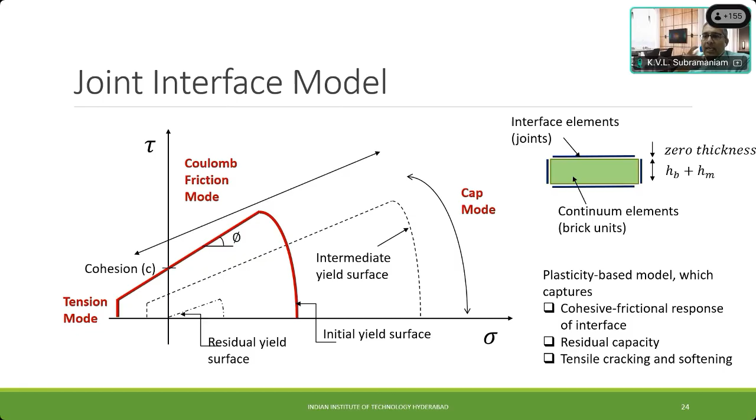And we're building houses with it. And what's worse is we're building load-bearing structures.

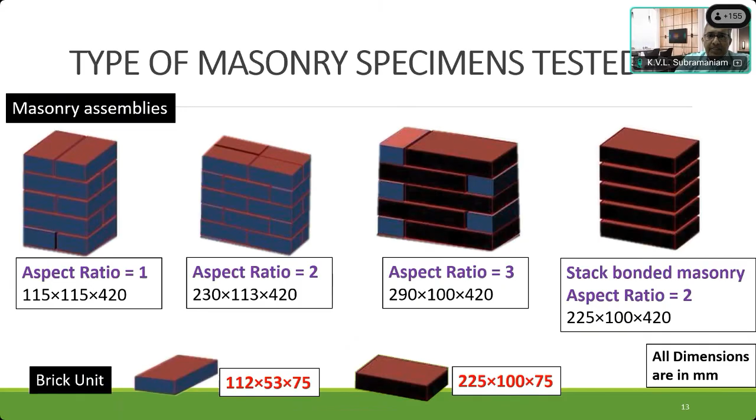The compressive strength of the brick was 15.6 MPa, which seems fairly good, right? But its Young's modulus is barely 1 GPa. If you look at the mortar, the 1:6 mortar - 1 cement to 6 sand - gave a compressive strength of 8.3 MPa. So that means the mortar is actually weaker than the brick, but it is 10 times stiffer than the brick. Its Young's modulus is even higher, even for a weak mortar. This is the state, correct.

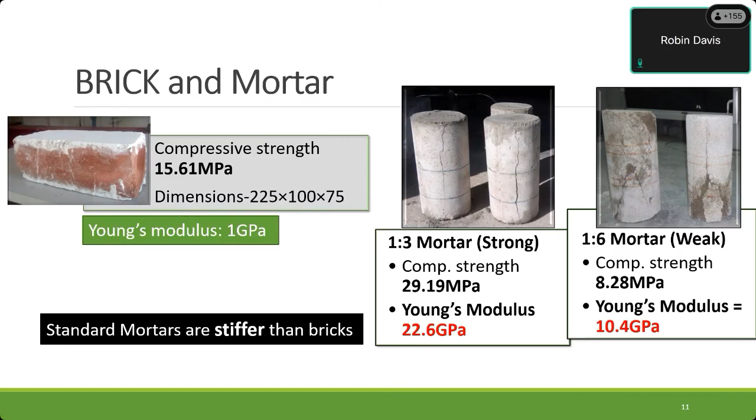Absolutely. This is a new learning for me, sir, thank you, it's very eye-opening. Thank you. Sure. Sir, one question I'm having.

I actually need your suggestion. If you want to find out the diagonal tensile strength following a code like ASTM E519, the diagonal compression test requires a 1.2 meter by 1.2 meter wall to be tested. Now constructing that kind of size of wall, and also if we do 3 specimens, 3 sets of tests, it involves a lot of funding, and the construction and all those things are also involved.

So what would you suggest - if we sample the test, like we do for the shaking table where the prototype model cannot be cast 3 times for one particular sample, can we do the testing for just one set or one sample and get the results? But some material variability is also present for masonry. Correct, and these masonry tests are actually very notorious - the variability tends to be very high. So doing a good test on masonry itself is very difficult, let alone large scale specimens, particularly the diagonal tension test, which is not easy to do. Getting that experimental test setup working and getting a good result takes some time and practice. That is the tricky part of working with masonry.